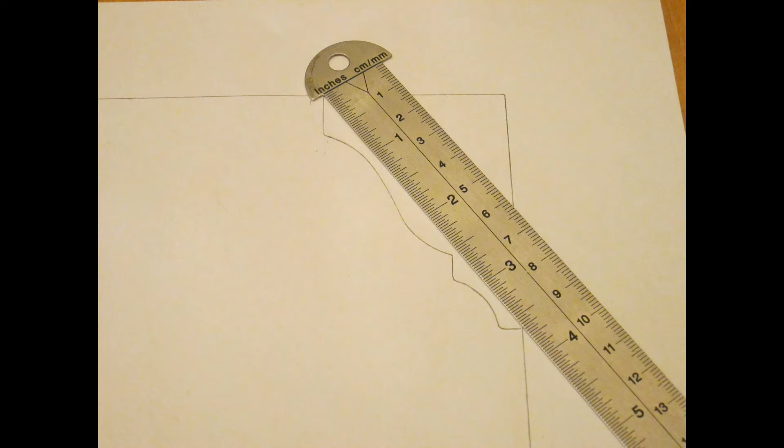Once the tracing is complete, I'll scan it and save it as a JPEG on my computer. Once you've got the image saved on your computer, it's time to open up SketchUp and then import it into the drawing. To do that, I'll go up to File and then down to Import.

Once this window opens, you'll be able to navigate through the directories on your computer and find the place where you've stored that file. I'm in the right folder right now, but I don't see any JPEGs. That's because the folder is being filtered just for SketchUp files, so all I'm seeing are the SketchUp files in that folder.

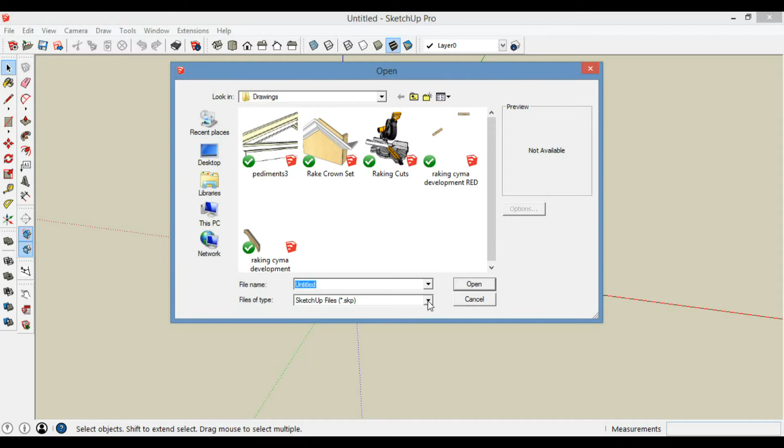If I click the down arrow here, I can go down to JPEG, and then that'll show me the JPEGs that are in this folder.

Here's our profile sketch, and I want to make sure I'm importing as an image and not a texture or a photo match. I'll go ahead and hit Open, and that'll bring the image into SketchUp.

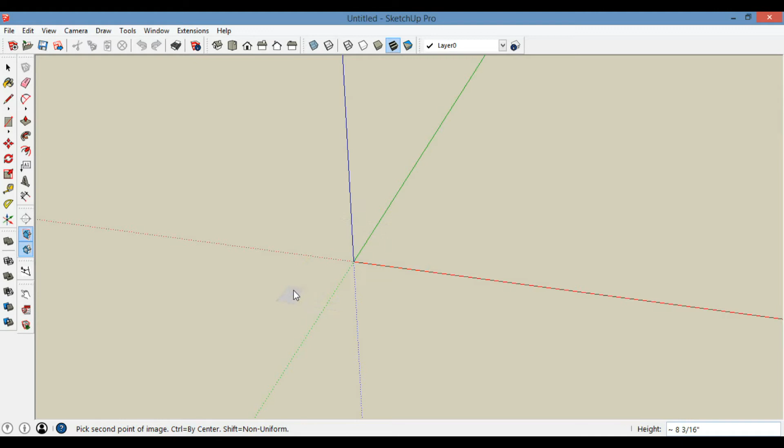I'll left click once and then pull out to stretch the image. I'm going to make it a fairly good size, and then left click once again to set the image.

To start tracing, I'm going to go ahead and start with a top view. I'm looking straight down on the image, and I want to make sure this scan didn't get skewed when I put it into the scanner.

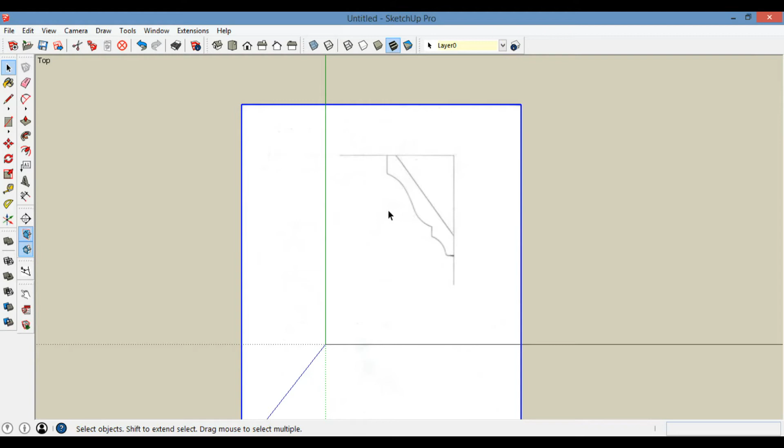To do that, I'll just use the tape measure and pull off one of the axis lines, and then move it over top of this reference line that I drew with the framing square. And it looks like we're pretty good.

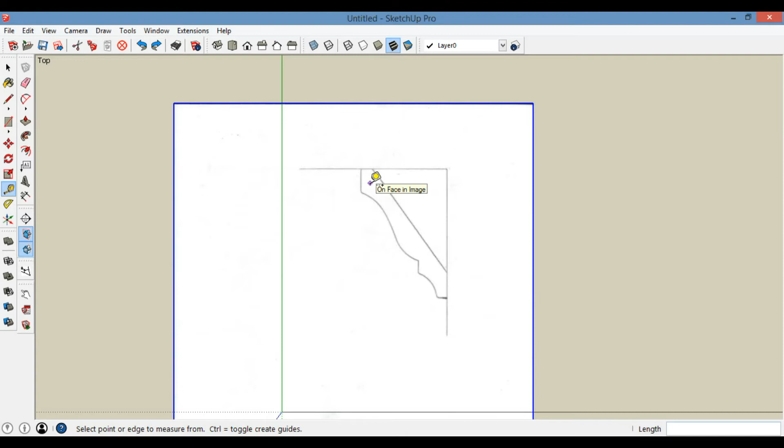Now I'm just going to back up instead of erasing that guideline, and I'll start the tracing process. The first thing I'll do is select the line tool and get rid of the simple line work, which will be starting up here at this front corner, and then tracing across here, just trying to split the line as best as I can.

I'll come back down the back side and down to the bottom, and then straight out here in the red direction.

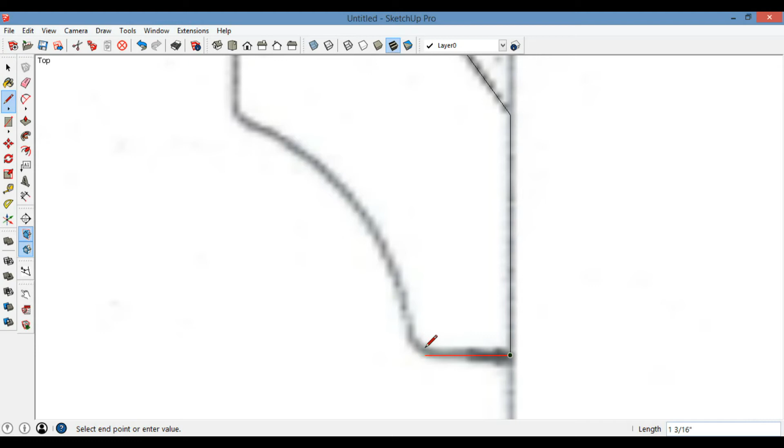You'll notice that this profile wasn't really very crisp. These transitions are kind of eased over. I'm not really worried about trying to trace over that portion of the drawing. That can simply be eased over with some sandpaper once the molding is produced.

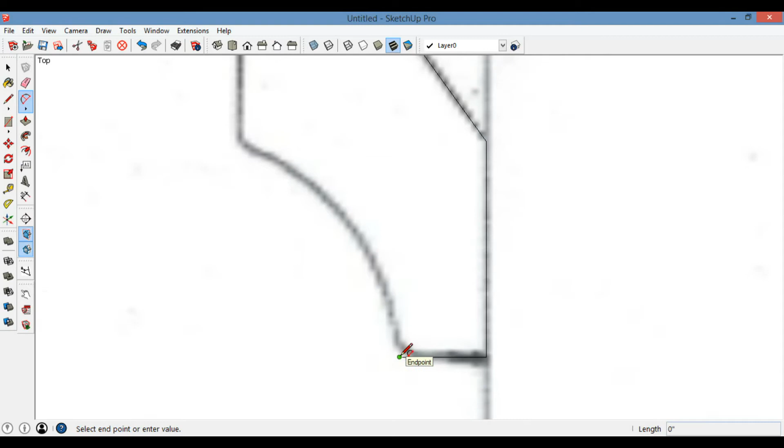But what I want to do is find where that arc in the cove should end, which is probably about right here. And then I'll switch to the arc tool, click onto the endpoint, and move up here to where the cove portion should end. Probably right about there.

And then it's just a matter of bulging out until I've got the line I'm drawing pretty much centered on top of that traced cove. Left click to set it, and then we're back to the line tool to draw up the fillet.

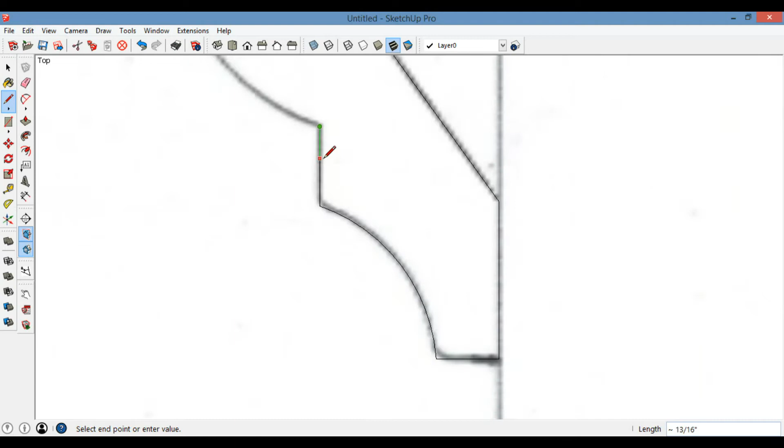And I'll draw up to at this point. And now most of the easy work is done. We have to produce this S-curve next.

And this molding is kind of a Greek molding. The curves here are more elliptical in shape than constant radius arcs. You can do this with the native tools in SketchUp. It's just time consuming and a little bit difficult.

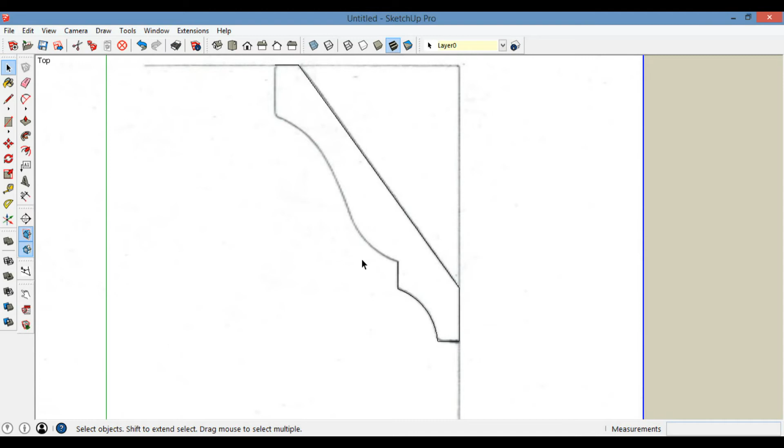Thankfully, there's an extension available in the extension warehouse called Bezier Curves, and this will allow us to reproduce this S-curve fairly easily. Once you've installed the Bezier Curve extension, you'll be able to find it in the Draw menu under Bezier Curves.

And the first thing you'll notice when you open this tool is down here at the bottom, we've got an input in the measurement toolbar for degrees.

This is the number of control points that you'll use to create this Bezier curve. The default is 3, and that's normally where I'll leave it for an S-curve like this. You can play around with it, add some more control points if you've got a really complex shape.

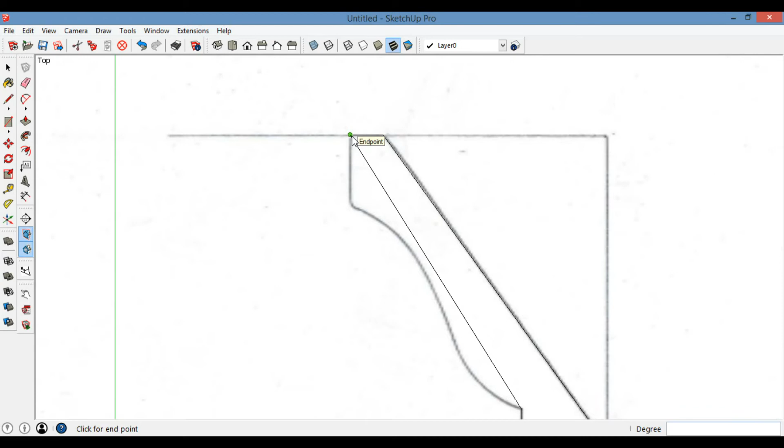But 3 will do it for us right now. I'm going to start the curve by left-clicking on the endpoint here, and then I want to make sure I'm aligned along this front fillet, so I'll just hover over this point for a second or two, and then I'll be able to inference and pull straight down to where it should end.

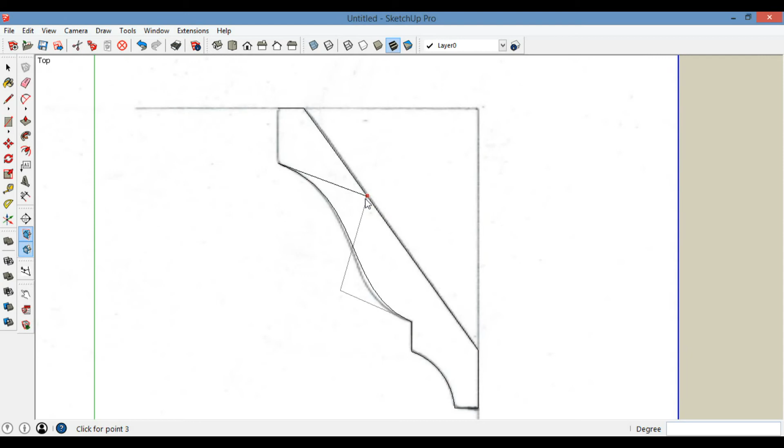Again, this corner is a little eased. I'll left-click once, and as I pull out here, zoom in, you'll see I'm able to create some more organic shapes. I'm going to pull out right about here to start, and then up probably somewhere about there. That'll do it. Now, I got pretty close on the first attempt.

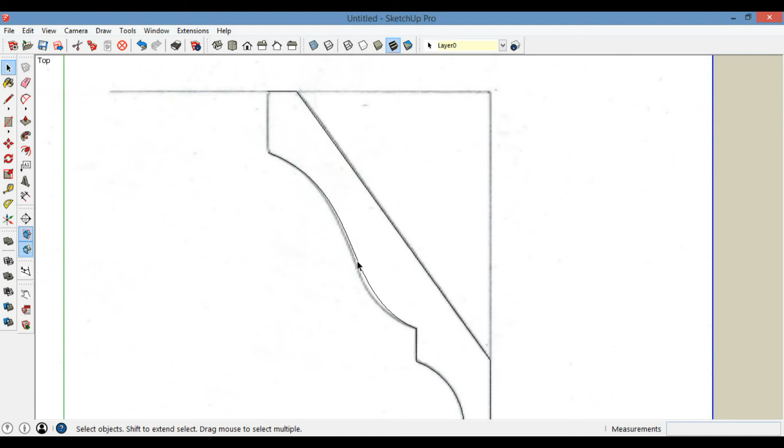It takes a little practice, and thankfully once this line is drawn, you have the ability to go back and edit it. And it's actually easier to shape the line once you've got it set. And to edit, you just select it with the select tool, and if you right click, the context menu will come up, and we'll go to Edit Bezier Curve. And now I can orient these control points.

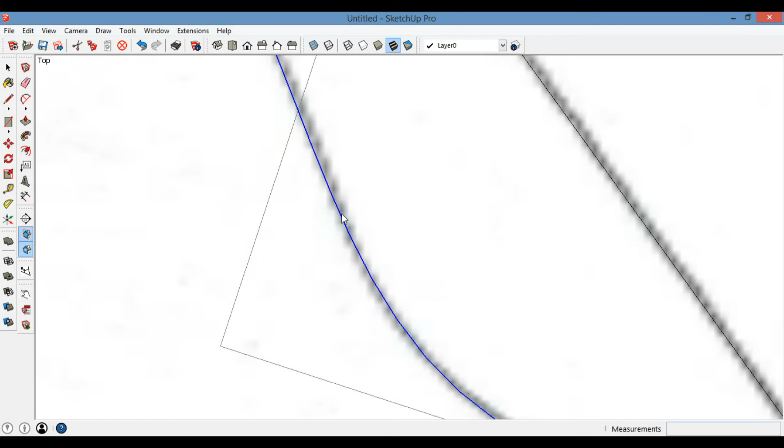I'll hover over this point for a second and grab it with the left mouse button, and then I can readjust it and bring that curve back in. So now we're splitting the line. Remember, this grayed out area that we're tracing over is actually the thickness of a pencil line, so we don't have to be that accurate. Once we're done, I'll just left click out here, and we're ready to continue with our face.

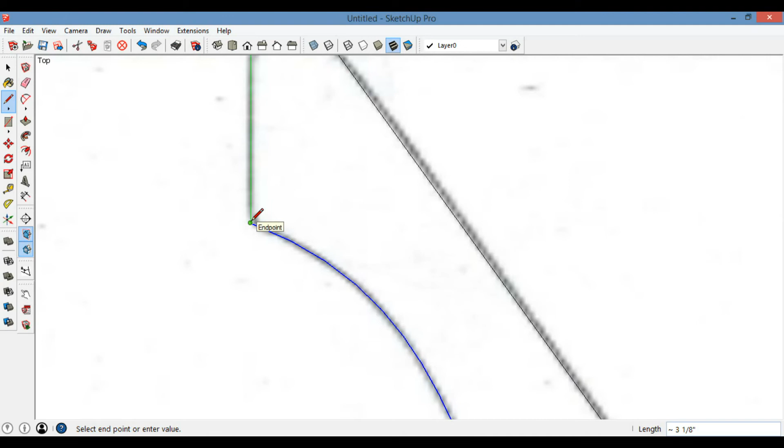I'll close it off by using the line tool and clicking from the top point there to the end point of that S-curve we just drew. And now we've got a face created. If you use push-pull on this face, you can see we've got a pretty good crown molding profile. I'm going to back up again because there's one more thing we need to do. This molding is not to scale right now.

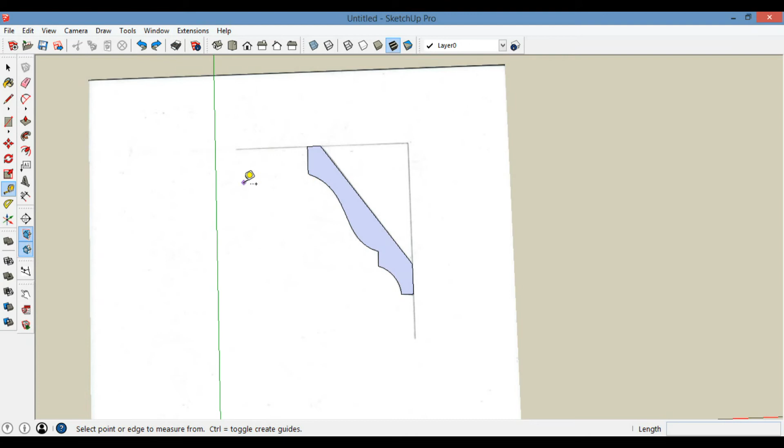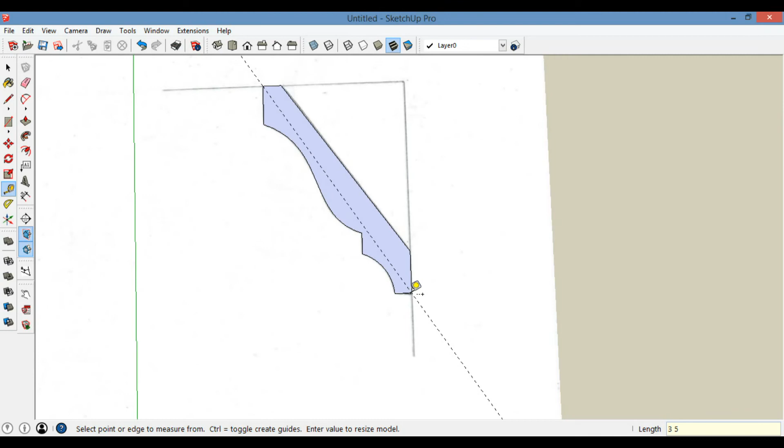If I use the tape measure tool and measure from this point back to this point, you'll see I'm about 20 7/16 of an inch. If I left click once, I can now re-enter the measurement that I actually want in the measurement toolbar. So we measured this molding and we found that it was 3 5/8, so I'll type in 3 space 5/8 and hit enter. This window is going to pop up and ask us if we want to resize the model. Yes, and you'll see that the molding looks like it disappeared. It actually just got smaller, and it's down here.

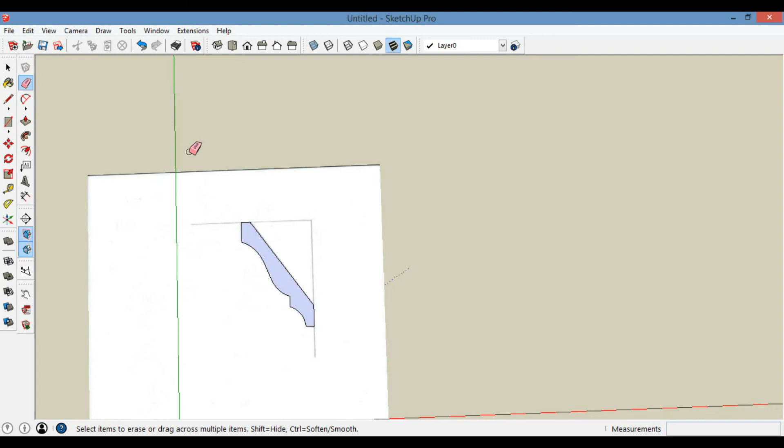So at this point we don't need the guide anymore. I can delete that, and I can select my image and delete that, and I'm ready to do a full-scale printing of this profile so I can test it and make sure that it's accurate enough. Over the years, I've received a few emails from people that have had problems printing full scale in SketchUp. So let's take a minute to go through those steps real quick too.

The first thing you'll need to do is select one of the standard views. In this case, we're going to use a top view so we can look straight down on the molding we're trying to print. The next thing to do is to get rid of any perspective in the drawing. And to do that, we'll go to the Camera menu and then select Parallel Projection. From here, we'll go to File and then down to Print Preview.

The first thing you'll need to do is uncheck these boxes here, one for Fit to Page and one for Use Model Extents. And now we'll be able to adjust the scale in the printout to match the scale in SketchUp. If you find that this boxed area here is grayed out and you don't have the ability to edit it, that's probably because you're either not in a standard view or you don't have parallel projection set in the camera menu. So once you've got both of those selected, you'll be able to edit.

So we'll change the In SketchUp to 1, so we've got 1 inch in the printout equals 1 inch in SketchUp. And we'll go to OK. And this is the problem that I hear most people complain about. This profile has been printed on 2 pages and it's actually split right down the middle.

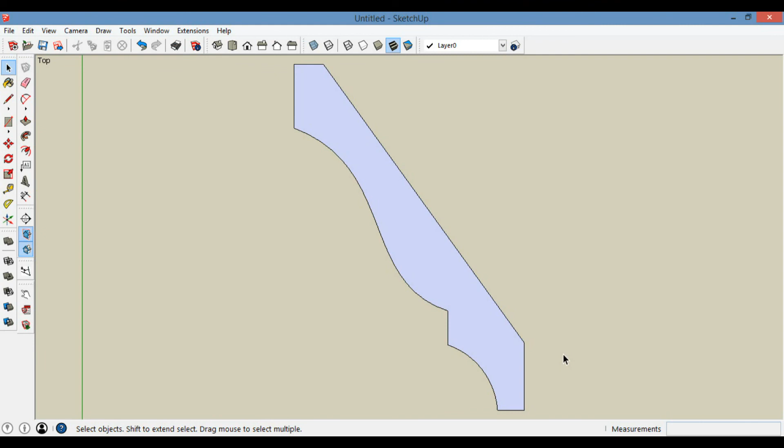To understand what's going on here, you have to realize that the print function in SketchUp works just like print screen. So everything in this modeling window is being printed full scale. So any blank space around the profile you're trying to print is also being printed in scale. You can use the Zoom Extents tool to try to crop the image as tightly as possible, and that'll probably work for this molding profile, but if you have a large, narrow profile like a baseboard, sometimes that's not even enough.

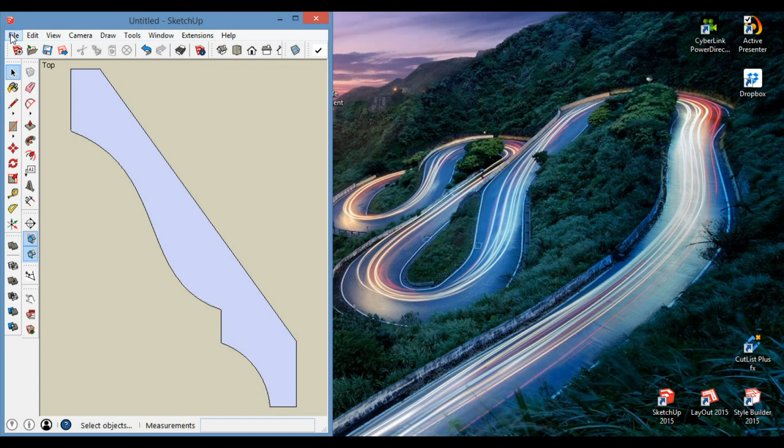And in those cases, what you can do is go to the Restore Down button and bring the window in so that you've got as much of the blank space around the profile cropped away. Now if we go to File, Print Preview, we'll go ahead and hit OK. And if we go back to one page, you'll see the molding profile is now centered on the page full scale. So once that's done, all we need to do is print it out for real, take our molding profile and set it on top of the printing and see how close we got.